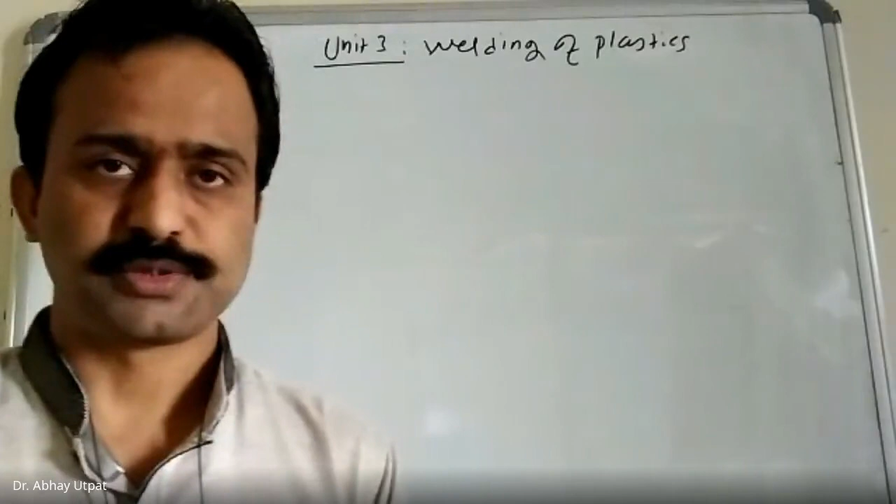In earlier manufacturing or molding processes of plastic, you have seen that a number of unique components are produced by the plastic molding process. There are many big components and big assemblies where you require to join plastic parts. So to join plastic parts, a number of processes are used depending upon thickness, size, material, and complexity of the product. Different welding processes have evolved.

So the word welding is not new to you. This is a very old word. You have already known this word, maybe even before starting your engineering.

In this process of joining metallic components, the base metal temperature was maintained - that was applicable to metallic welding process. Same concept applies to joining plastic components, where instead of base metal, this is base plastic. So I will use the word base material instead of metal - base material temperature, its melting point.

Now, not only melting, but one important thing is degradation temperature. Remember, this is the important difference between welding of metallic parts and welding of plastic. In welding of plastic, you are going to plasticize it, but you have a limitation of heating - don't go to such a high temperature that degradation of the plastic starts, meaning it will start losing its properties.

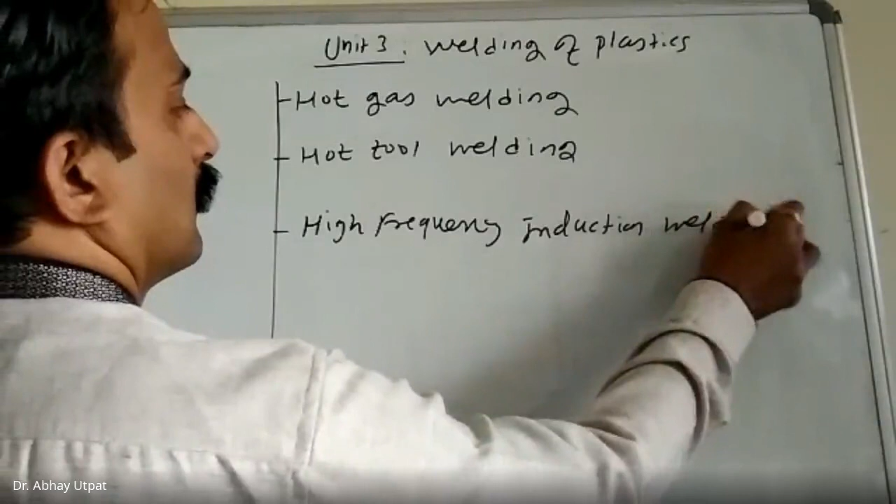Now let us see the classification of these welding processes. We are going to cover 4 to 5 processes: hot gas welding, hot tool welding, high frequency induction welding, infrared welding, and nuclear welding.

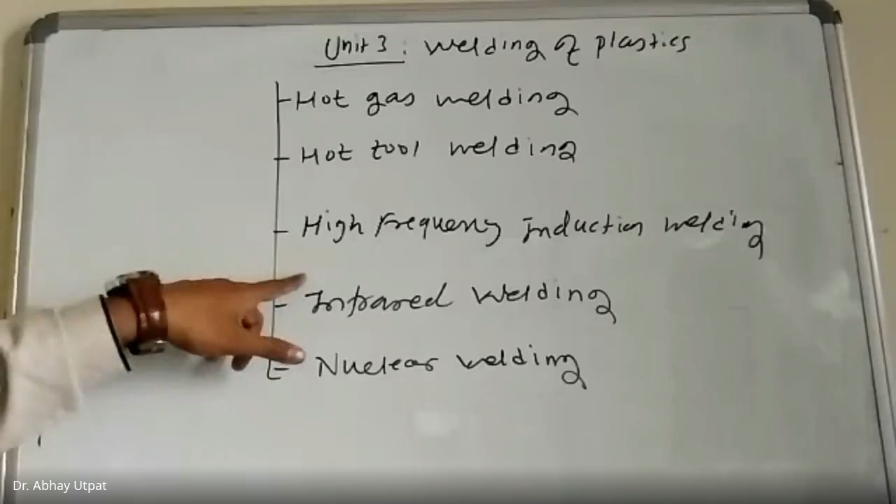So how to join plastic components? Welding means the joining process. The different plastic components are joined by using the following methods: hot gas welding, hot tool welding, high frequency induction welding, infrared welding, and nuclear welding. With the help of these processes, we are going to study the joining of plastic.

And why is joining required? Why is welding required? Because when it is not possible for us to produce such complicated components, and when there is a limitation - for more and more complexity of the component, you are going to have to change the design of the die.

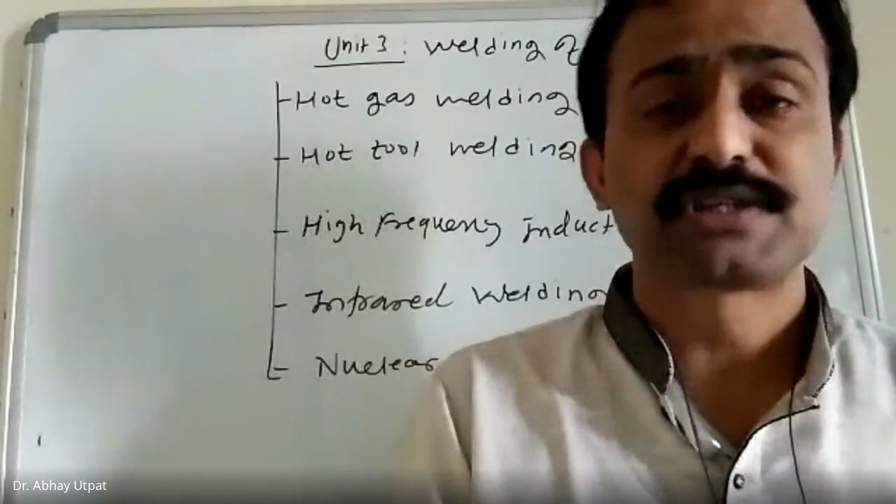And for your kind information, even to manufacture a simple plastic component, you require a metallic die - die steel is used. Don't just count that the weight of the die is 10 kg and calculate steel cost that way. Its design cost, manufacturing cost, and other costs go beyond 2 to 3 lakh rupees for a simple die, and beyond 20 lakh rupees for a complicated die.

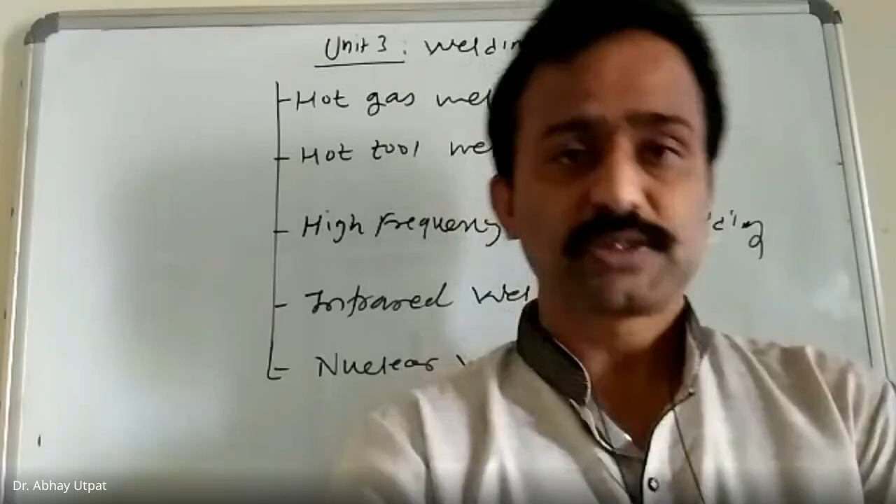That's why little complexity is compromised, and it was made possible by joining the components, so that you'll get the unique component after joining.

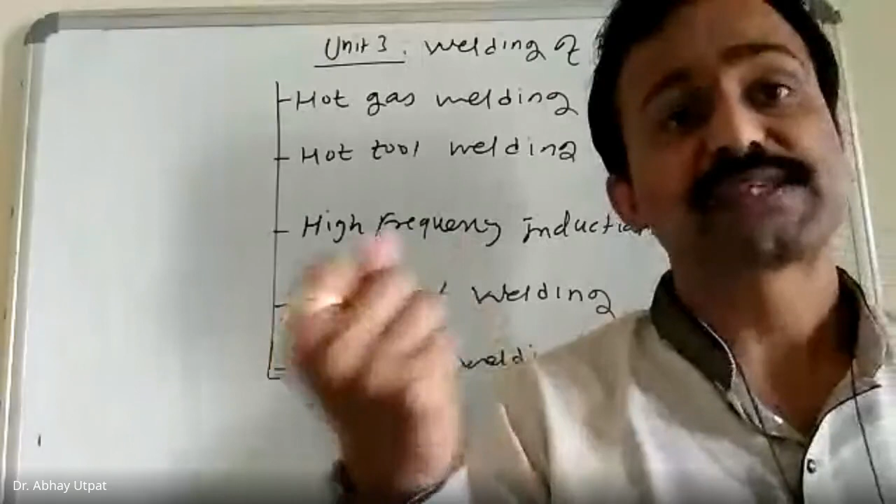Now hot gas welding. Here there is no actual welding of the metallic parts as in gas welding. Gas welding means gas is used for making the flame. Here there is no flame.

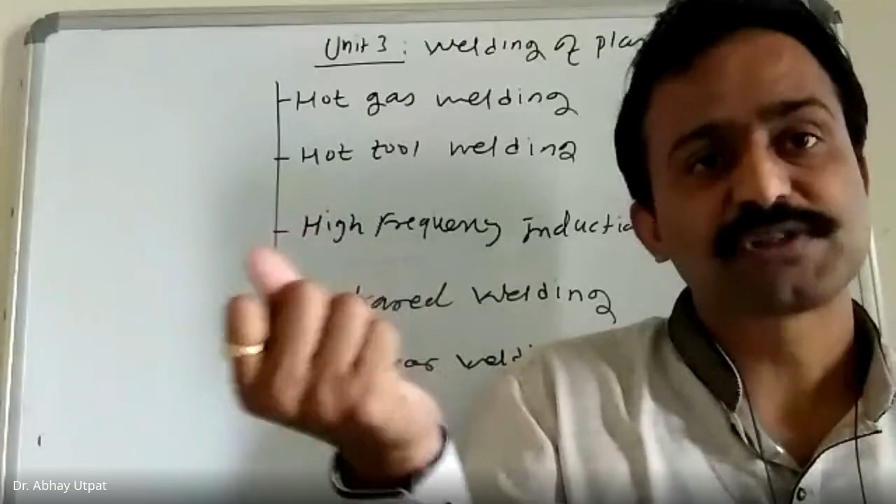Remember, this is one more difference between welding of plastic and welding of metallic parts or alloys. In gas welding, acetylene gas, hydrogen gas, or their combinations are used for producing the flame, and that flame is held against the metallic part to melt it.

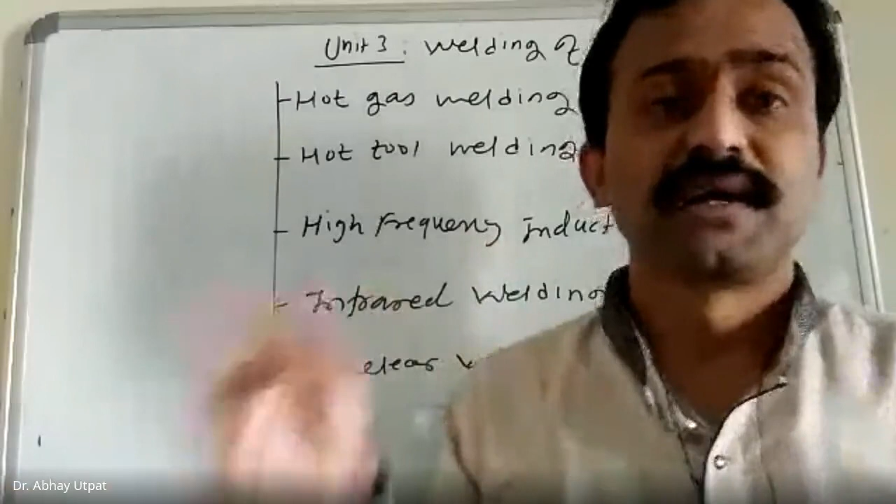Here, this gas is not going to make any flame. The gas itself is hot, and that hotness, that temperature of the gas causes melting and plasticizing of the plastic.

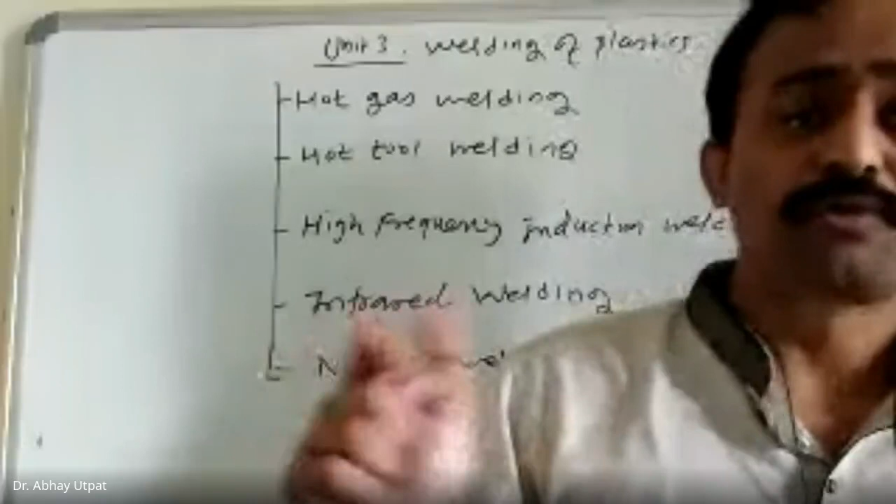Usually air is used. Hot gas means hot air. Otherwise you have to use some gas like argon, which will not make any reaction - neutral gases are supposed to be used.

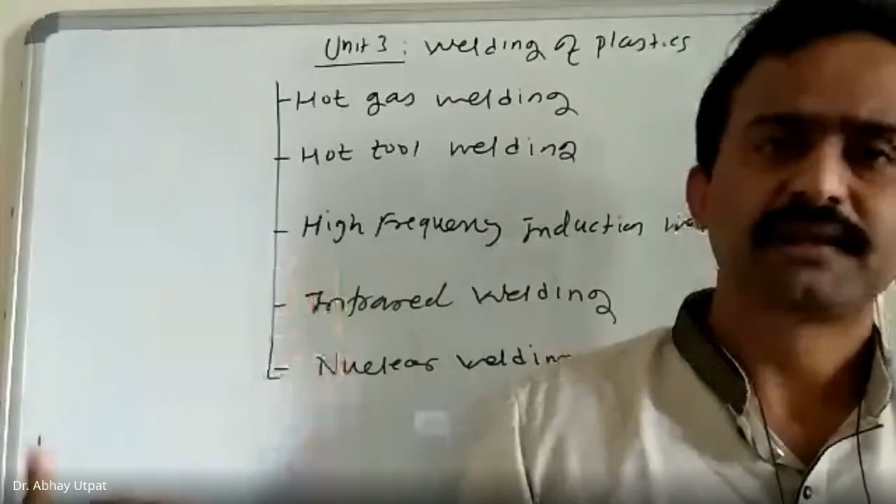So the best way is hot air, hot compressed - hot air is used, and it is forced against the joint through the nozzle. The temperature of air is maintained in a separate chamber, with heaters, and through that heater hot air enters the nozzle, and from the nozzle it enters the joint, and that temperature of air causes melting of the part which is to be joined.

So there is no flame as such. I repeat: in case of gas welding of metals, gas is used for making the flame, and there is combustion. Here there is no combustion. Remember, this is the main difference.

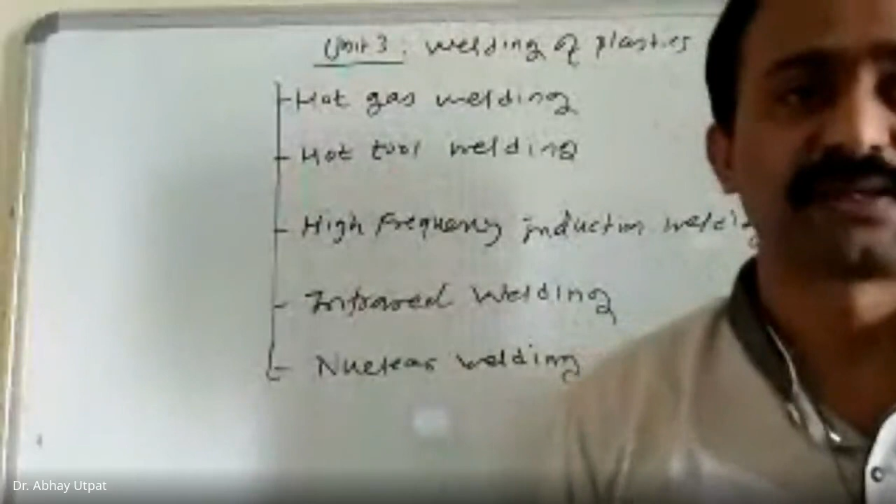Hot tool welding: some metallic tool is made hot, and that is used for plasticizing the plastic. Everywhere, the aim is to plasticize the plastic, to make it semi-solid.

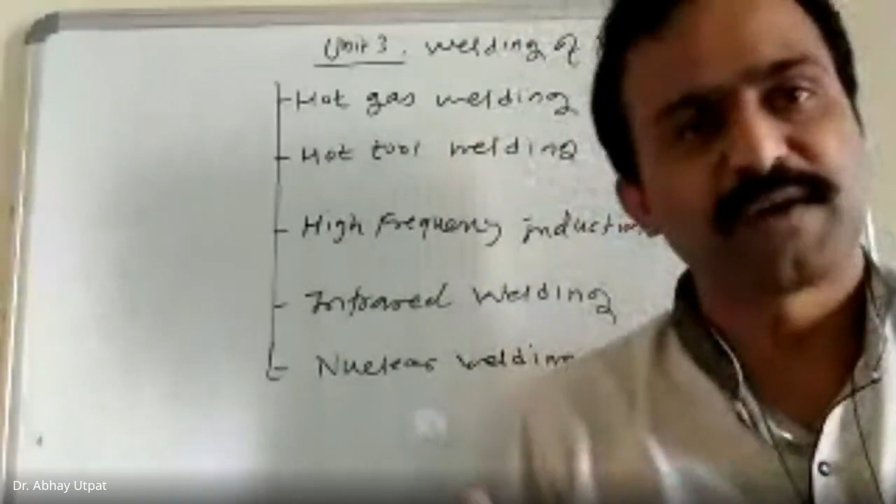Then high frequency induction welding - you know the induction principle, when current is carried through the primary, it generates in the secondary, and the process is carried out. Infrared rays are used for heating the plastic surface, bringing it to the plasticized zone.

And nuclear welding means bombardment of protons etc. is used for providing the heat. The aim of every process is to provide heat for plasticizing the plastic. So let us see one by one.

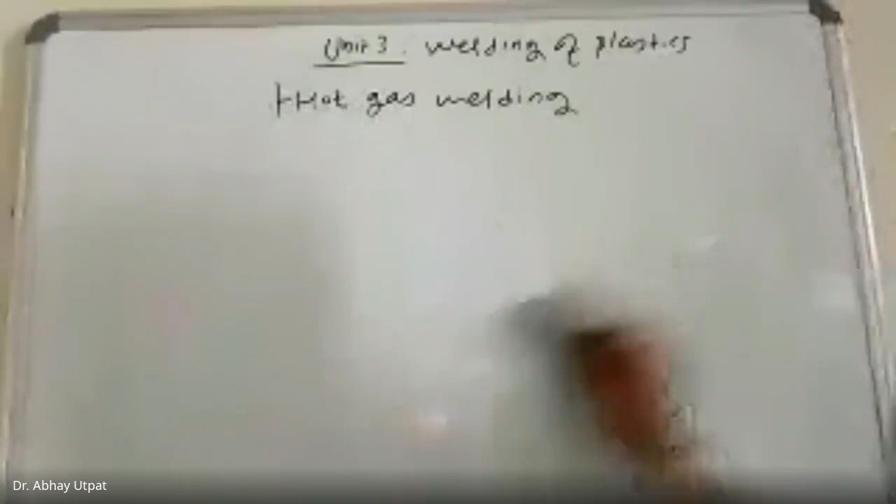First, write down hot gas welding. I'll draw the figure, you can draw along with it. A simple figure.

This is called beveling - making the bevel-like shape notch so that filler material can be filled.

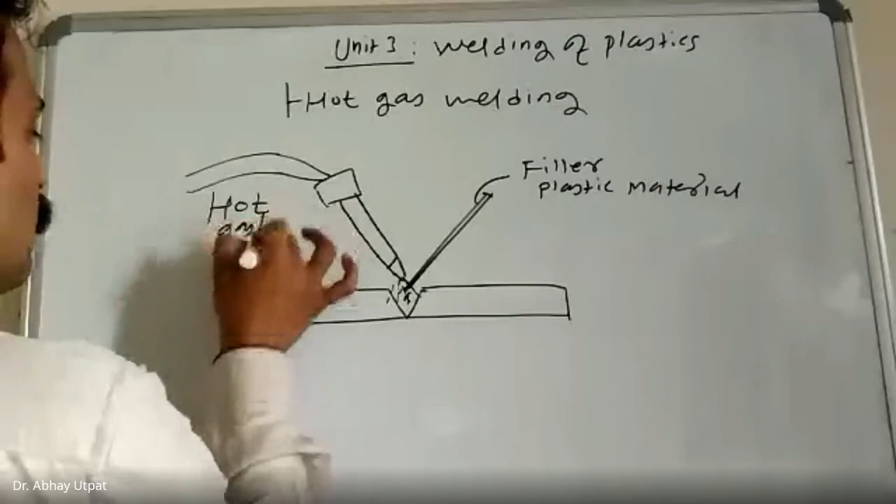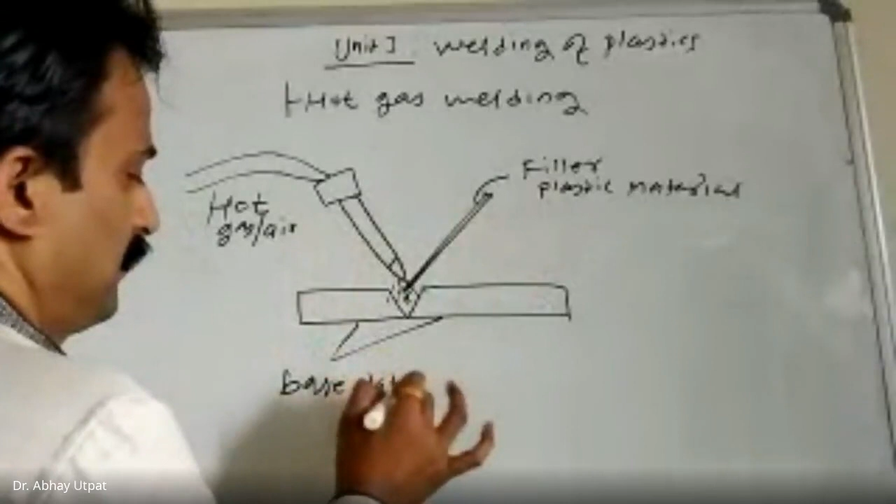So this is the source for hot gas or hot air through which heat is generated, and then it will cause melting of the base plastic as well as the filler plastic. These are the two base plates. Draw this simple figure.

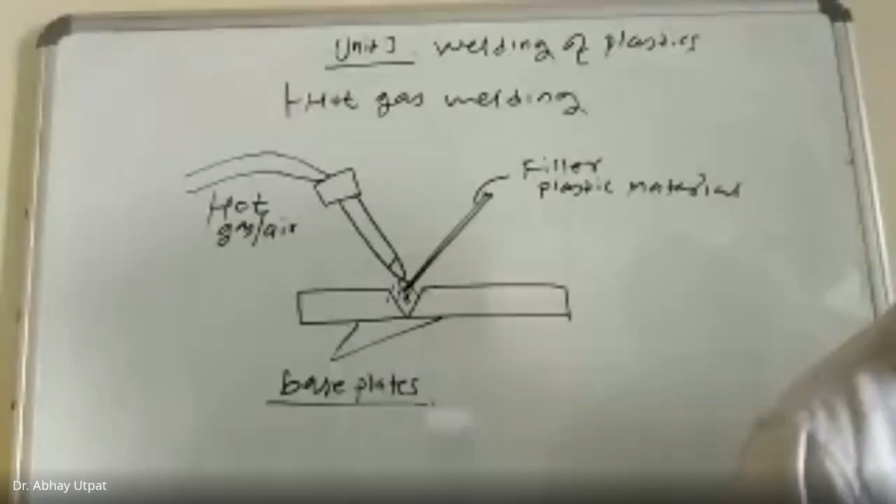This process is used for joining many thermoplastic materials. The temperature of heating varies around 400 to 700 degree Fahrenheit - 400 degree Fahrenheit to 700 degree Fahrenheit.

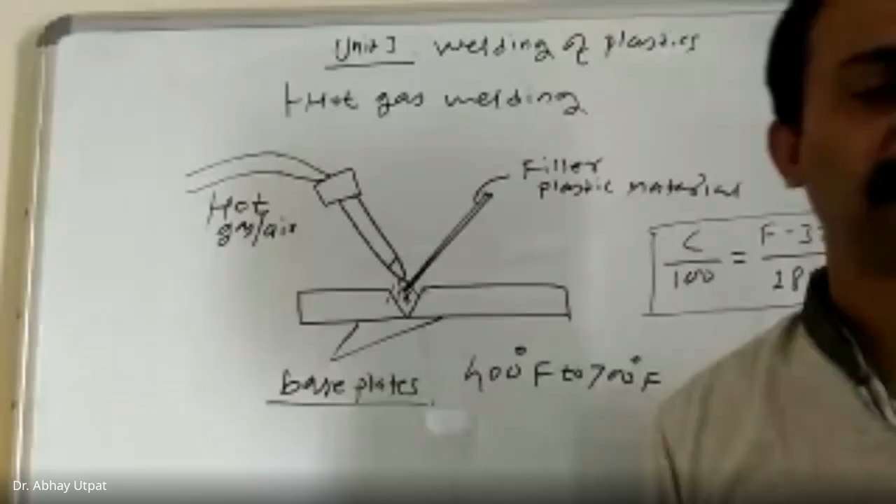So how to convert degree Fahrenheit into degree Celsius? You must know: degree Celsius upon 100 is equal to degree Fahrenheit minus 32 divided by 180. You can write this formula at the upper side. So convert this 400 - if you put the Fahrenheit value here, accordingly you will get degree Celsius. So C upon 100 equals F minus 32 upon 180.

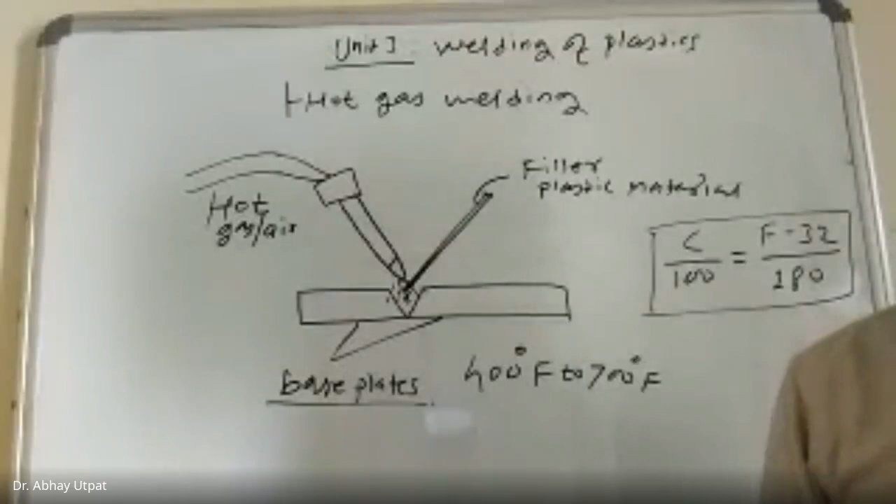Whatever molten plastic is there, it will spread away. This should not happen, so skill is a little required here. And the pieces which you want to bond, I already told, must be produced with a V-shaped joint or it must be beveled.

One important logic, same as metallic welding: this filler material must be of the same material as the base material. Otherwise, there will be a mismatching of the properties.

Whenever the filler rod is used, it is held against the hot air so that it will melt and fall. Material falls into the gap in the form of droplets, so it fuses into the joint, and heat from the gun is directed at the interface.

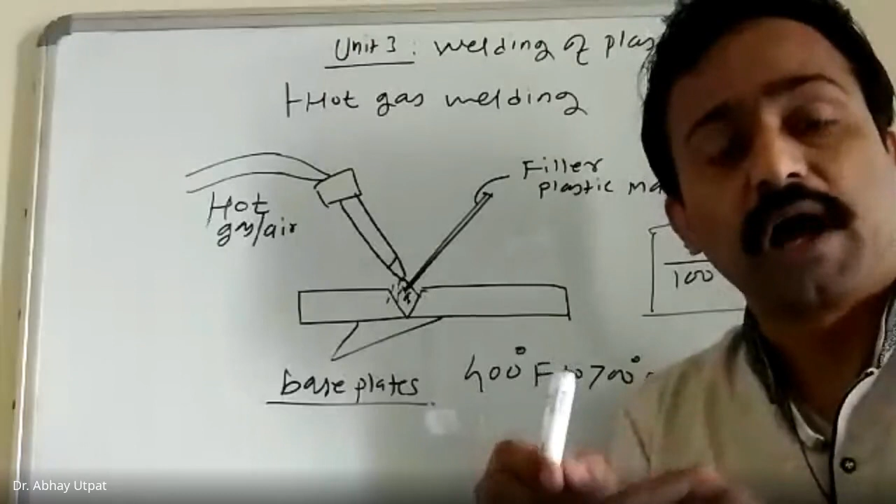From the chapter on welding in manufacturing processes, do you remember the different ways metal deposition takes place? As a curiosity, you can search that book and check the metal deposition processes.

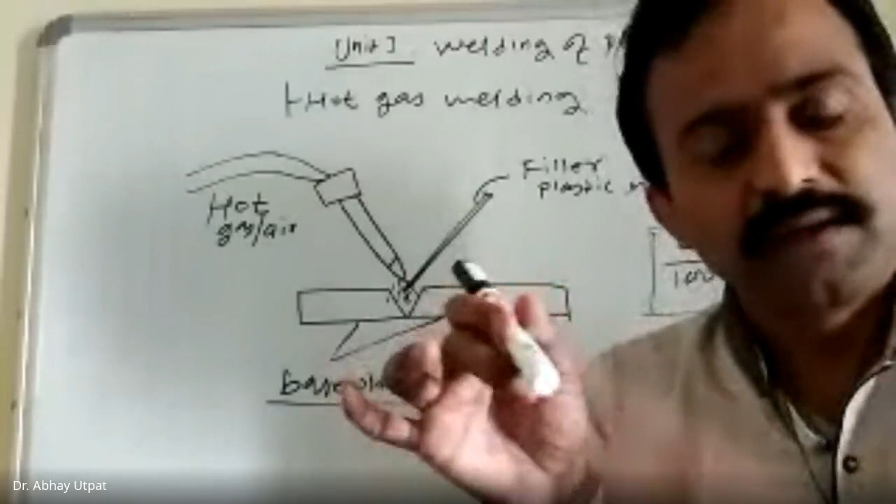Now here there is no metal, here is plastic. But whatever material deposition takes place, it is by a different mean. With the electrode used in metallic welding, the consumable electrode goes into the gap either directly in the form of droplets, or it may go in the form of sprays. So that process is totally different.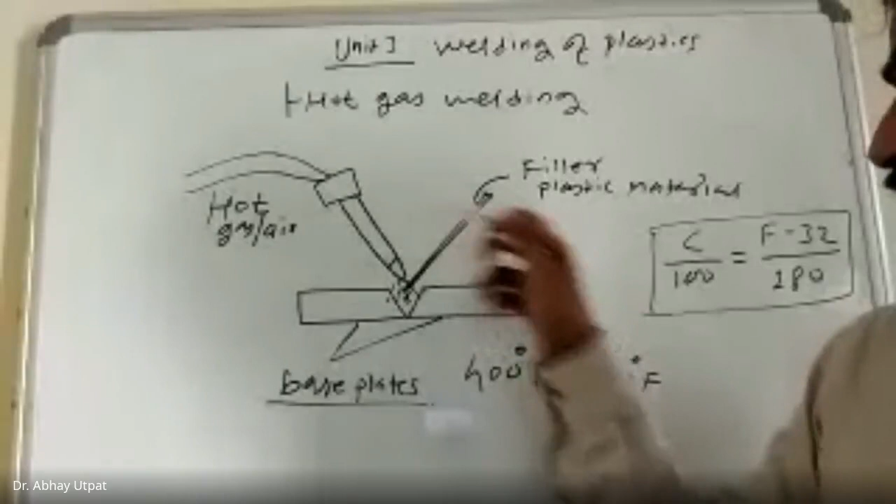Here, the plastic rod is heated by hot air. It will be plasticized. Material falls into the gap, and at the interface again, the gun is held so that a complete joint is produced by mixing the filler at the joint, and after cooling you get a strong joint. This molten product is directly at the interface, and it fills the gap. Whatever gap you have provided, accordingly this gap is filled by the rod.

After the cooling process, your aim is that the joint produced should be very strong, like a unique component. A strong fillet must be formed, which is of considerable importance.

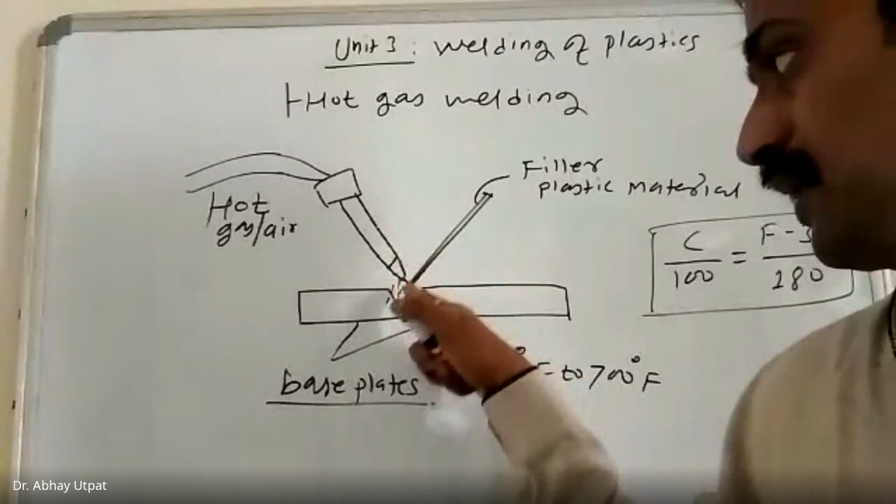Otherwise, if you just join and fill the plastic material at the gap, and there is no combination or complete mixing of the base metal with the filler material, then your joint will not be strong, it will not remain for a long time, and there will be failure of the joint.

One important thing, I am repeating this statement once again: what temperature are you providing here? Its range is given by me, so you have to check this temperature against the melting temperature of this plastic and its degradation temperature.

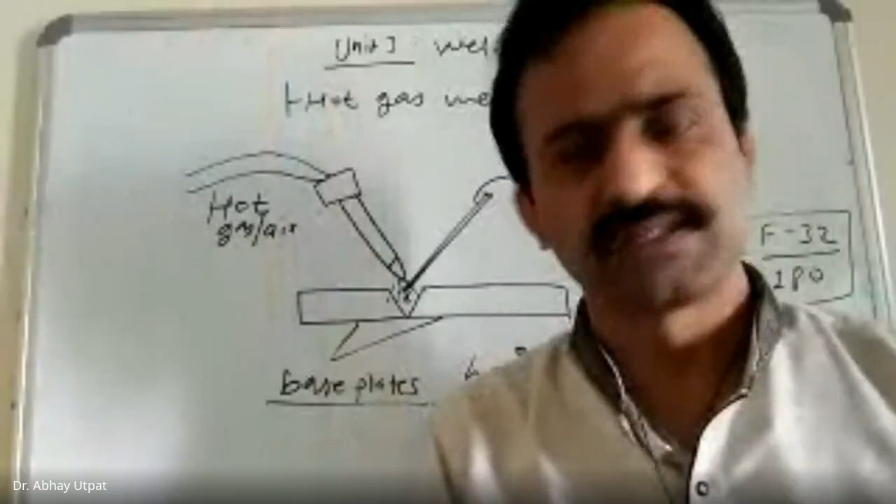There is no question of degradation of metal in metallic welding, because if the melting point is, say, 1000 degrees Celsius, you provide heat and the temperature rises to 1100 something, and there's no problem, the molten metal and filler rod get combined. But here there is a problem, because this plastic is a polymer-based material.

Plastic is a polymer-based organic material, C and H elements are there. If you heat more than the optimum temperature, melting will be fast, and joining and combination of the filler and base metal will all be achieved.

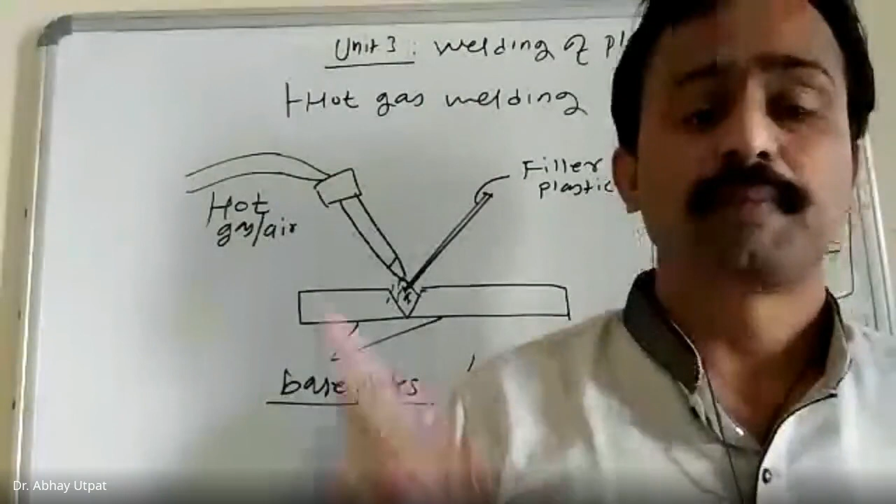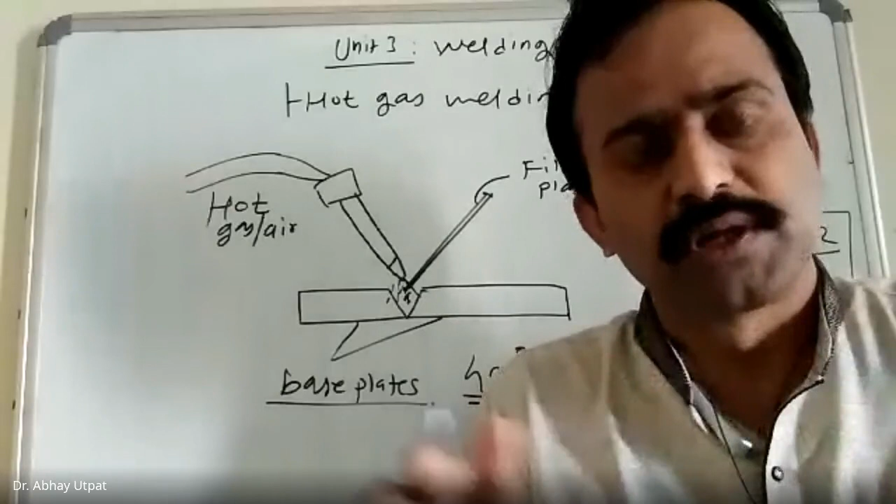But on the other hand, the plastic will start losing its properties because of high temperature of the air or gas, degradation. That's why your heating temperature must be maintained such that it will just melt, just make the plastic semi-solid, just plasticize it, so that there is mixing of filler into the gap of the two base plates.

No other requirement than this. Overheating will cause this degradation. Even in metallic parts, overheating and burning is one of the defects in forming processes. Burning causes it to become blackish and lose its properties.

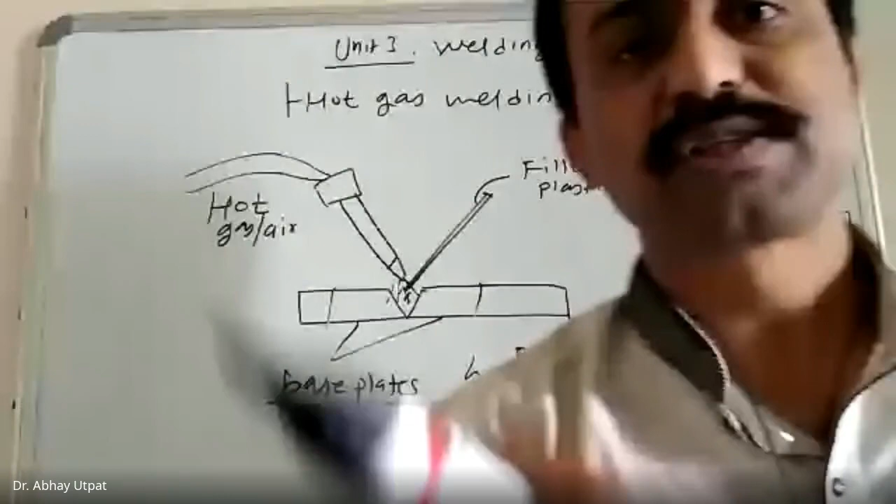That's why in metallic welding there is a very important concept. What is that? Can anybody tell? Now this question goes to you. In metallic welding, the surrounding area is called something. I want the answer from your side. You can do your research work on it, an interesting topic.

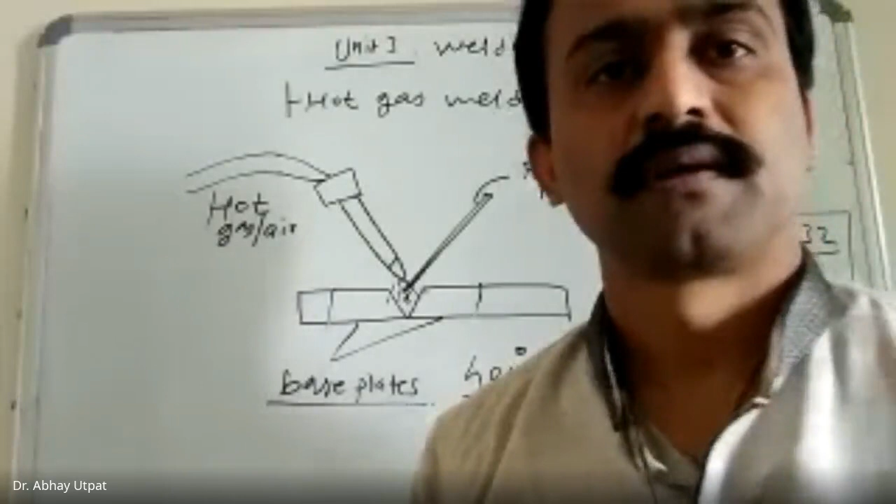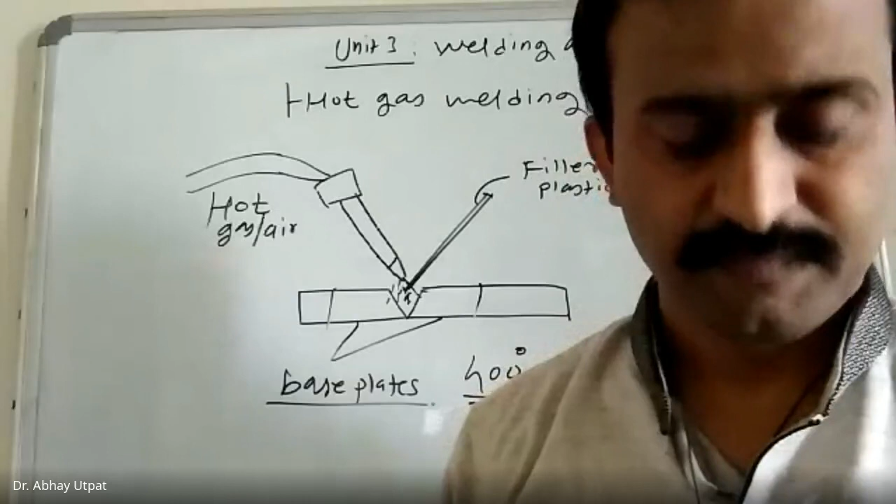Ajinkya Jadhav, roll number 23. Roll number 23. This is the problem of your class, you are not alert, who will tell willingly? I want an answer, what is this area called? Narayan Vyavare, Mr. Narayan Vyavare, are you there? Akash Kendre. Yes sir. Answer my question, Akash. My question is, this is a welding area, what is it called surrounding the welding from both sides? This is one zone, I have given 50% of the answer to you. What is this zone called which is around the welding spot or welding area? Yes?

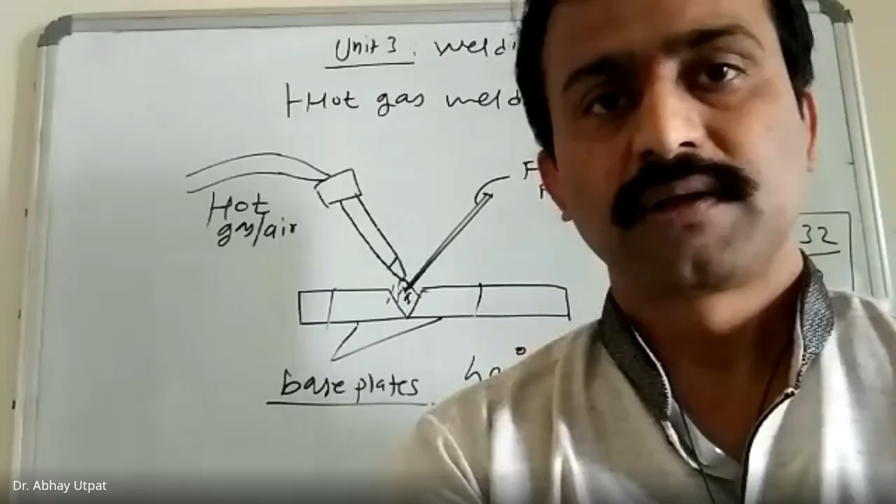You don't know this, Akash? No, sir, I don't. You are in 8th semester, mechanical engineering. Not only you, all people. This is called heat affected zone, HAZ. You have studied this in second year. Are you knowing this? Yes, sir. Have you heard this word? Yes, sir. Okay, now you can unmute.

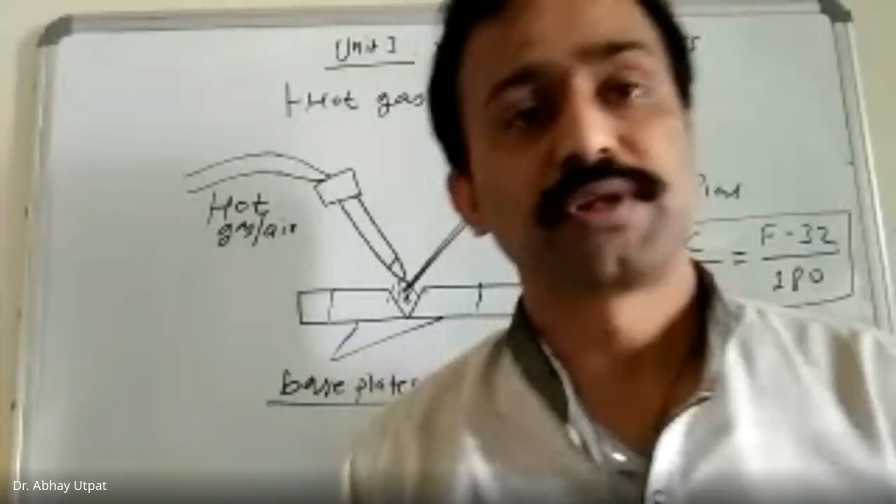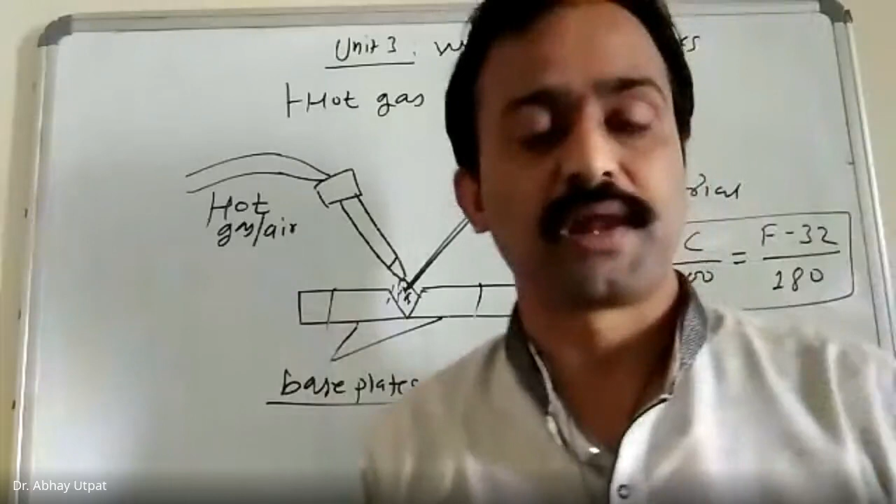So there was a concept of heat affected zone in metallic parts, and we have studied metallurgy too. If you are joining steel, then surrounding it, because of the heating and cooling cycle, there is a phase change. If your base steel is pearlite and you don't want to change it, sometimes the phase near it becomes martensite or bainite, or if it's already martensite and you are joining it, because of air cooling it becomes pearlite once again. That's why that zone is called the heat affected zone.

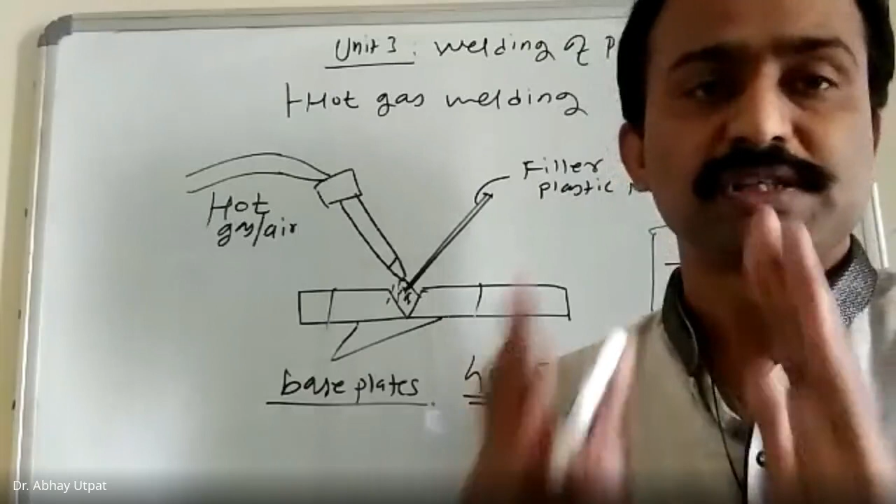So in case of plastics, you can consider this as a heat affected zone too, but to avoid the degradation, you must ensure that the heating temperature of gas or air is optimum, just to fulfill the purpose of melting, not for extra heating, to avoid degradation. Air is used best because it will not affect any other properties.

Plastic materials like polythene and similar types undergo oxidation, and that's why the selection of hot gases and hot air must be proper. Sometimes safety gases or neutral gases may be selected instead of air, because many times air may cause oxidation. To avoid it, neutral gases are also selected. That's why the process is called the hot gas process, with air considered as one of the gases. So to avoid oxidation, hot gases which will not cause any oxidation are also used.

The most commonly used hot gas is nitrogen. Nitrogen gases are used. Once the welding joint is prepared, whatever stresses are generated must be relieved. After the welding joint, it should not be stressed.

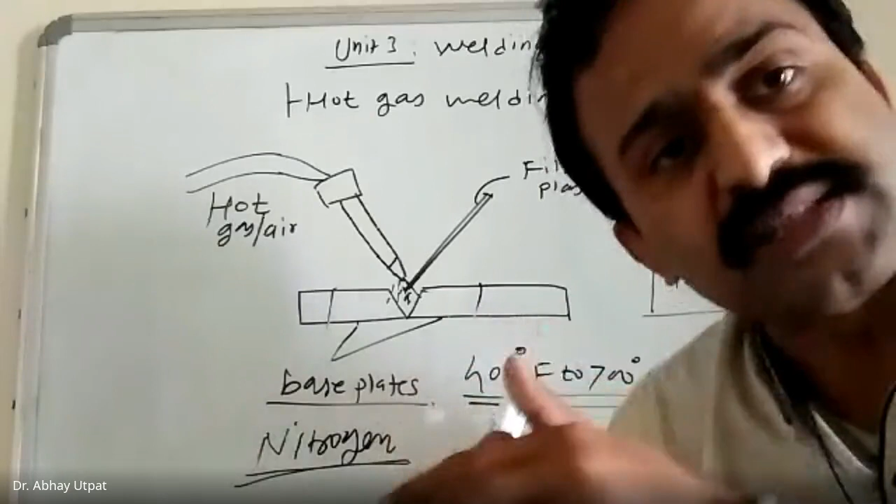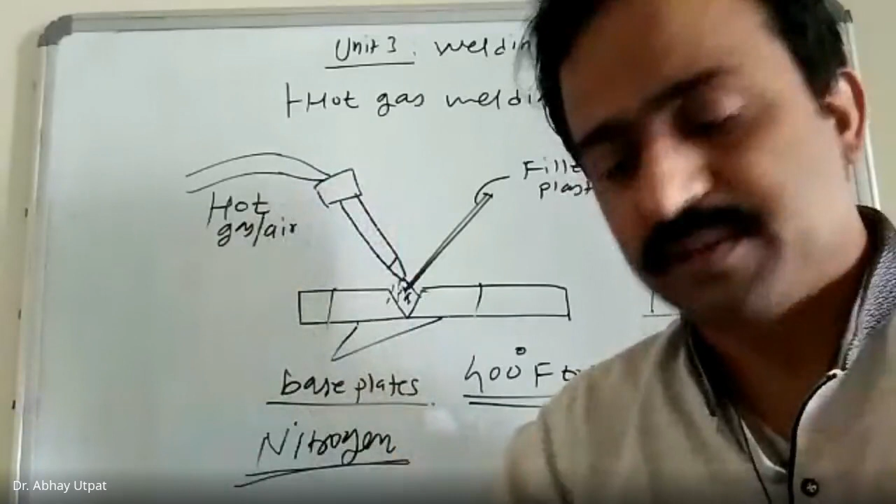Here you produce the joint, and if you try to check it, it will break because you have not yet permitted it to cool. You should not elongate it, put it under compression, or put it under stress, because though the outer side may feel solidified, the inner side is not, as polymers are bad conductors of heat. This is very important: in metal there is a chilling effect, but in polymers, when it comes in contact with atmosphere, the upper area gets solidified, but the inside may still be soft and in a plasticized state.

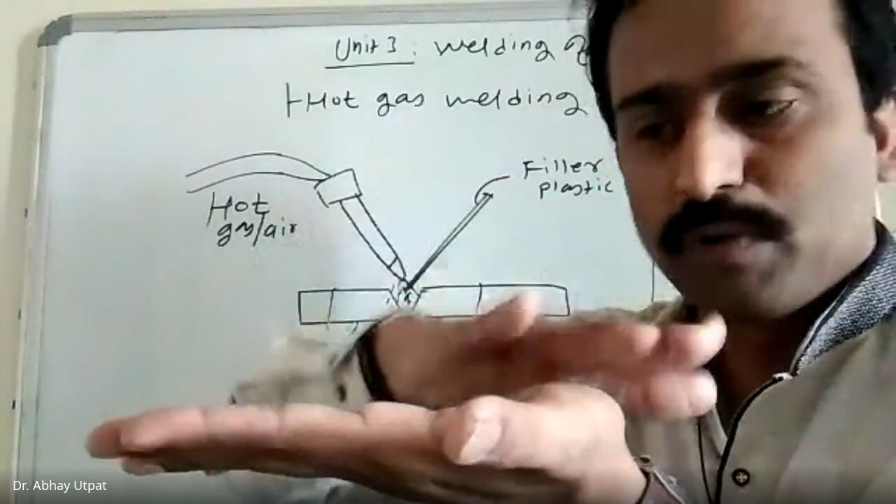What happens is, the upper surface gets solidified, but the inner part, up to the base of the joint, will not solidify easily as these plates are thicker.

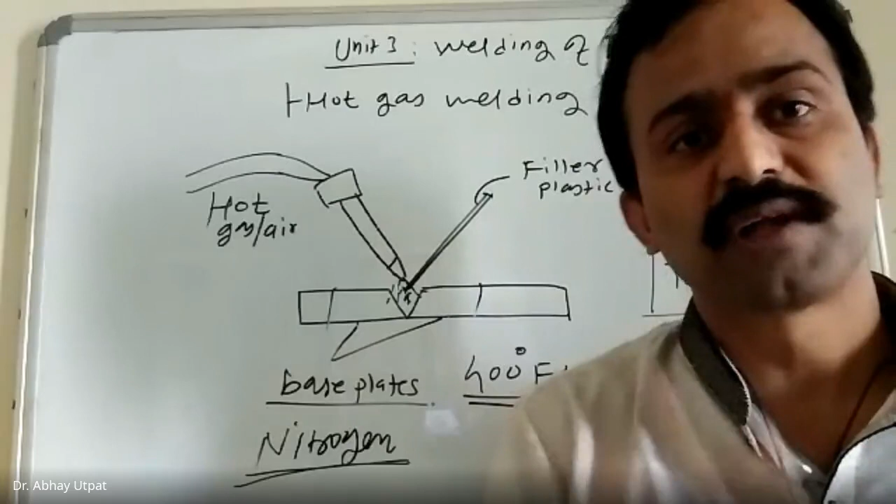That's why, remember, in chapter 4 we are going to talk about minimum wall thickness. So wall thickness is very important. If you select a larger thickness, it takes hours and hours to cool because polymers are bad conductors of heat, unlike metal. Hence these parts should not be disturbed for a particular period, maybe hours, until they completely solidify and come fully out of the plasticized zone.

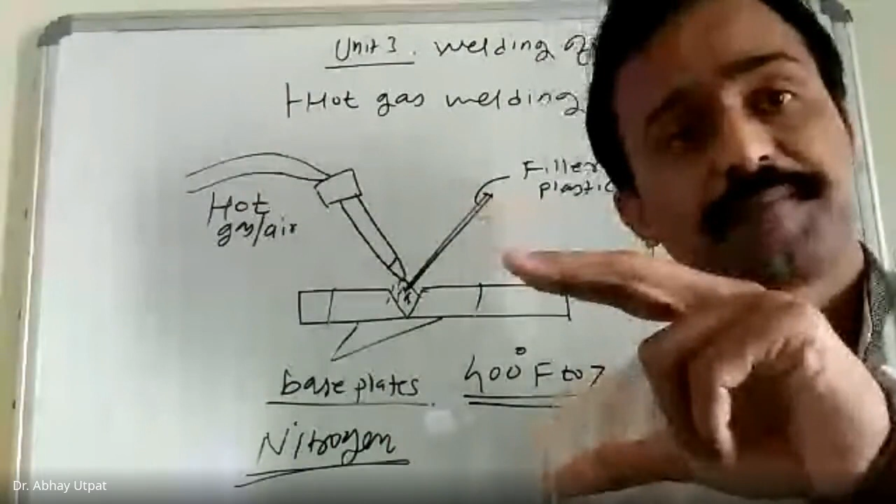4 inch to 6 inch size. And the welded product is not commercially attractive.

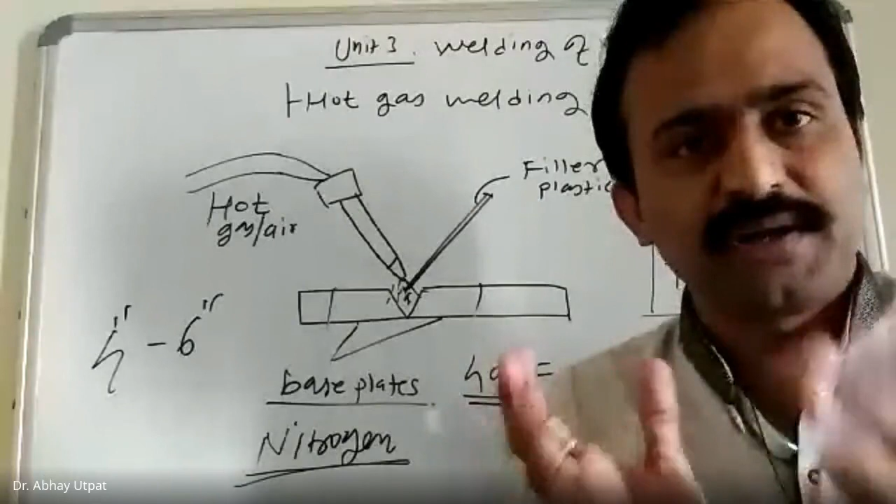Very simple. Joining with the help of hot gas or hot air, and that filler material is going inside, so the attraction or aesthetic look, design you have seen, that commercially attractive product will not be achieved. That's why for some other processes like high frequency induction welding, their products are attractive, because welding is very precise in that case. Here there is no precise welding, that's why product is not attractive, and this may be considered one of the limitations of the process.

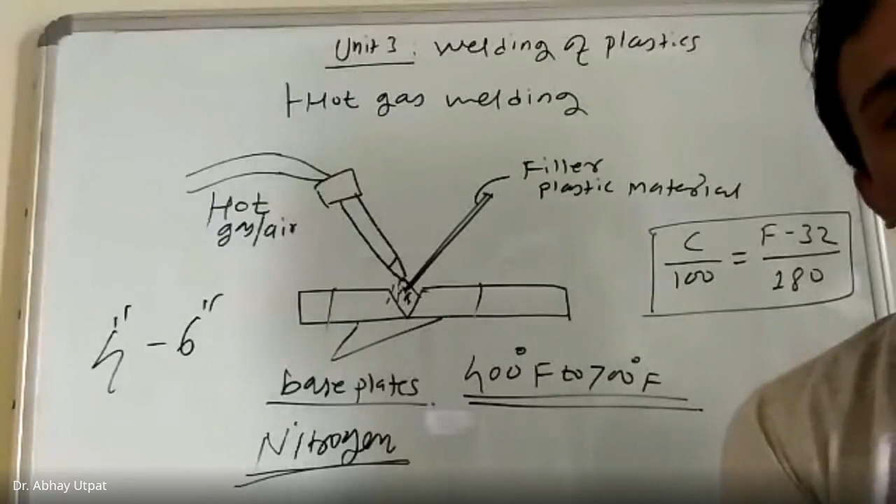We can say one more thing, that tensile strength is near to 80% as that of parent material or base material. If tensile strength is suppose 200 for this base, so the joint's tensile strength may be around 180, 80 to 90%. So that much strength you can achieve with the help of hot gas welding process.

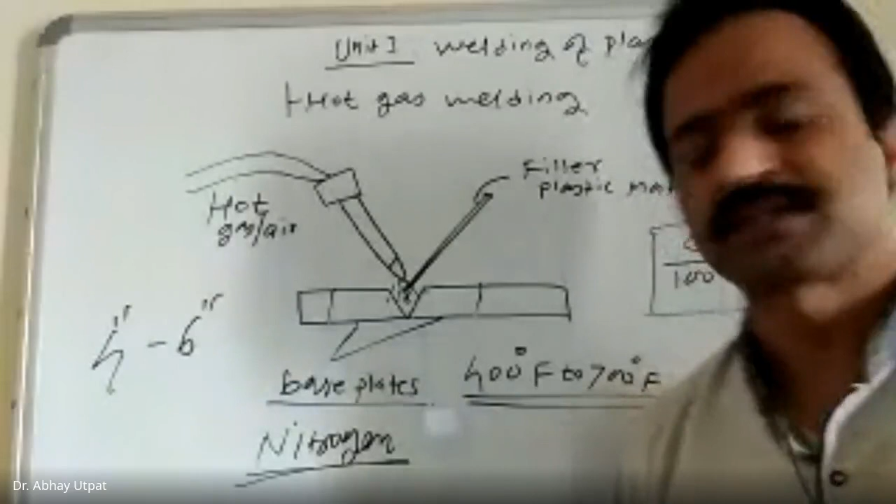And where it is used: large structural assemblies, wherever in industry you have seen there are big structural assemblies made of plastic, this process is employed. So I repeat once again, I will take review in 1 minute.

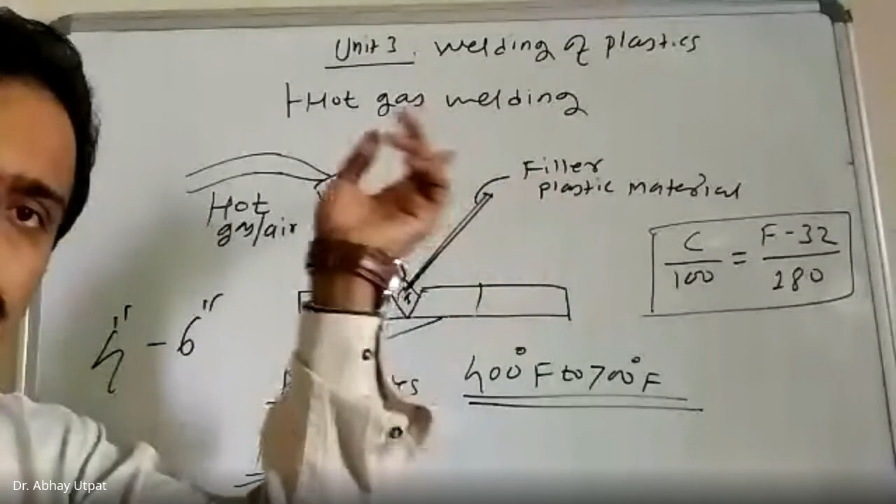Hot gas welding: actually gas or air is used just for providing the heat to the base plate or to plasticize the joint and filler. There is no flame as such like gas welding in metals. I repeat once again, many students get confused. Gas welding in plastic does not produce any flame. Gas itself is hot, air itself is hot, and the heat from that gas or air is taken for plasticizing the plastic. Range is 400 to 700 degree Fahrenheit, and accordingly the minimum temperature for plasticizing is achieved.

Extra temperature, extra heat will cause degradation of the base plate. These polythenes and other material, there may be chances of oxidation. Hence preferably gas is preferred, maybe nitrogen gas. The thickness is more, thickness may be 4 inch to 6 inch, and it is used for large structural joints.

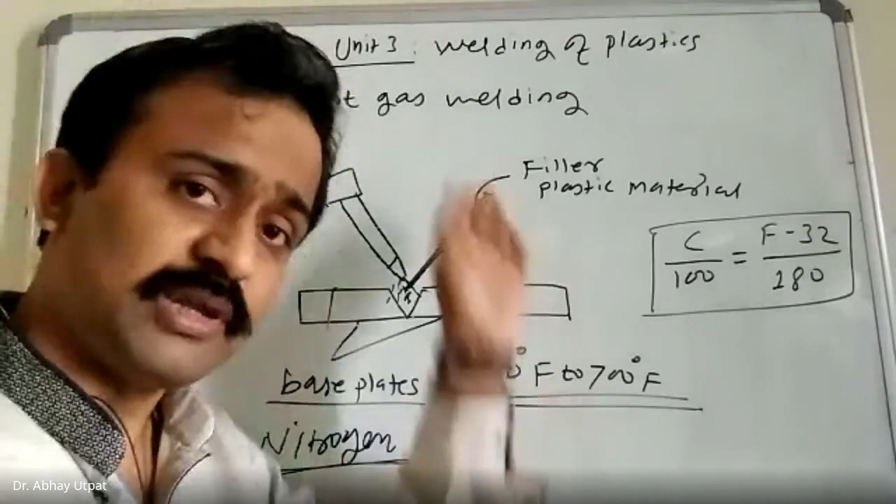Okay, this is all about hot gas welding process. Subjective question may be asked for 3 or 4 marks. We have covered many MCQs here, more than 4 to 5 MCQs are covered in my explanation. They are provided in the booklet, no problem, but whenever I am telling some important things, you must immediately note it down.

This temperature of heating, thickness of the plate, which gas is used, what is the filler material requirement, and how hot gas or hot air is performed for heating purpose, and the part which is joined should be kept for sufficient long time because thickness is more.

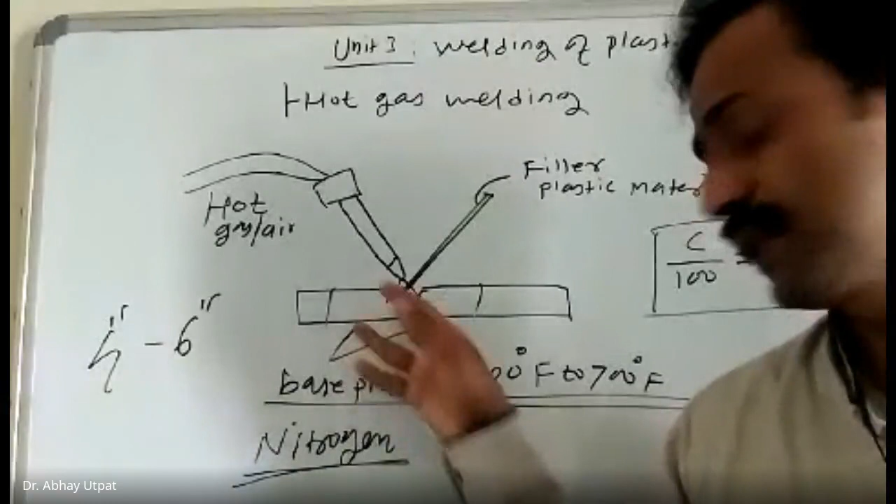I repeat once again, the part which is welded should be kept for sufficient long time till complete solidification at the joint. It may take hours, and that is considered as process time being more, which is a disadvantage. Otherwise, if you try to stretch it or pull it or hold it, the inside part, as I have given example, the outer surface may feel strong, but the inner part may still be in solidifying range, and you may cause breaking of the component in between.

This is all about hot gas welding. So I hope you have drawn the figure. Next, let me explain hot tool welding. Please draw this figure. I hope you have drawn it, and I have not dictated as such. Whatever I have explained to you, I hope you have noted down the points. Notes will be provided to you, don't worry.

Joining of plastic with the help of some hot tool. This is a very general question, even I will ask this to other branch students, they can answer this. So please reply to my question, little participation is required. Shubham Bansode, roll number 8: in drainage pipe joints, okay, drainage pipe joints we have seen.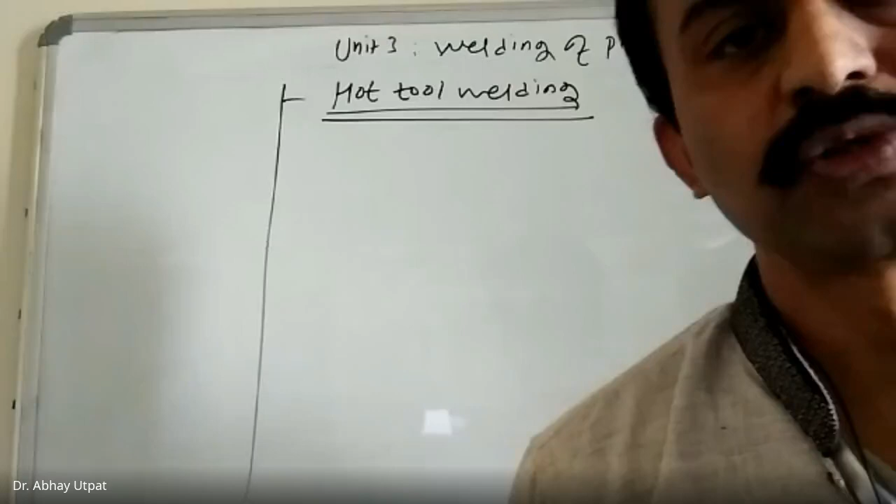How was it, how was any hot tool used there? Tool, drainage pipe joints, the people may be just heating and putting one pipe in other. Abhishek says circular plate, correct. So one thing Mr. Shirsagar has answered correctly. Any other process where the plastic is joined by using some metallic tool which is hot? Any other student? Asture Chandraprabha, roll number 1.

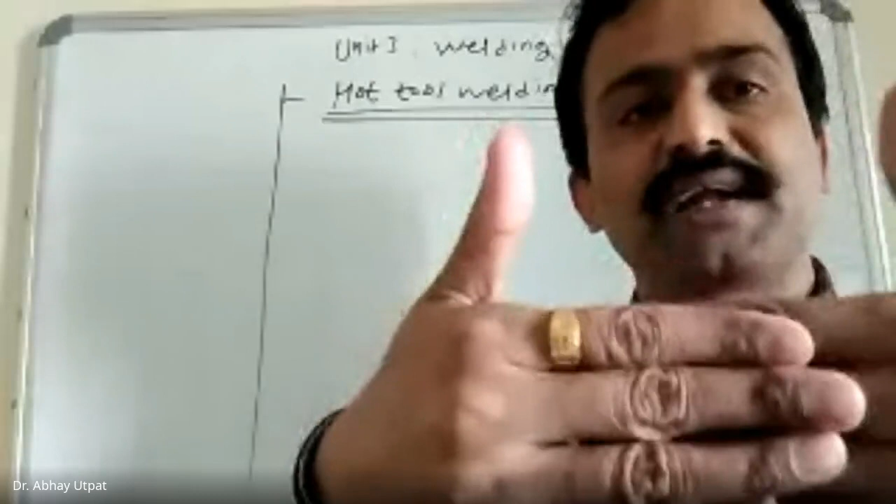There was joining. You have seen in different grocery shops or malls, the polythene bags packed with the grocery material using a press heated tool. Or you might have seen a heated tool or plate kept somewhere. If you go near a Mandir, you will find prasad material being packed by holding it against a hot plate, so your polythene bag gets sealed. Packing of your polythene bag is the best application or example of heated tool welding.

If you have not seen this, go to any grocery shop or mall where packing is going on - material they are putting inside. I will show you: assume this is a plastic bag. Material is put inside, then held in this way, forced against a metallic plate, or kept horizontally with a handle where the metallic plate is at the back, and they press it down. Electric current heats that metallic plate, and when you press it down, these two plastic films get joined to each other.

So joining of a polythene bag is the best example of hot tool or heated tool welding. If you have not seen it, you can go and see whenever you go.

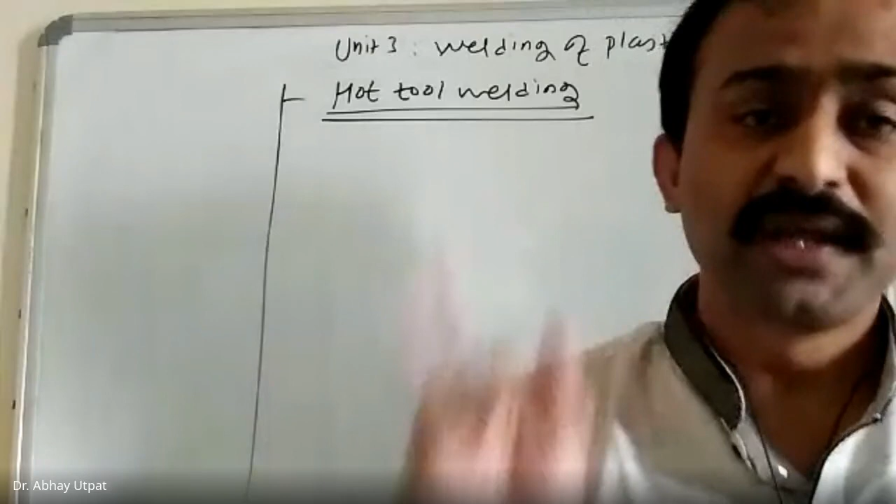Many times in our surroundings, in day-to-day life, we observe many engineering principles, but we don't look at them from an engineering principle point of view - we just see it as a regular or routine process. There are many things we come across, and if your vision is there from an engineering point of view, you can understand these things. So hot tool welding or heated tool welding - the best application is joining of polythene.

This is not only limited to joining polythene bags, but there are many thin plastic sheets joined with the help of this process. Don't look at it as a single product or batch process - batch process means 100 bags, 20 bags. But in industry, there is a mass process - thousands of plastic sheets are to be joined at a time.

There are other arrangements too - let me show you the example. This plate I want to join with this plate, and it has more width, maybe 1 meter or 2 meters, almost 6-7 feet width. And I want to join it here. How can I make this possible? There are roller type arrangements - putting a large 10 feet plate would not be economical, so a roller type arrangement is made.

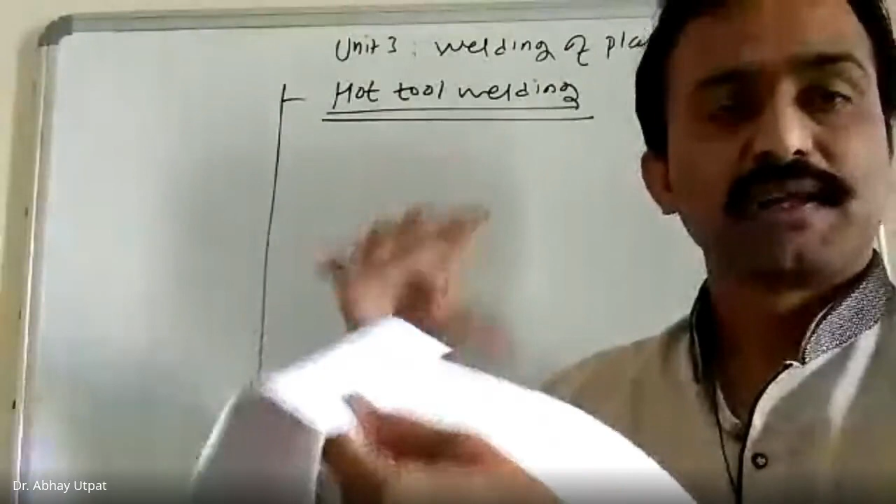The rollers will roll over the superimposed or joint area, the matching area, and the roller itself is hot - upper roll hot, bottom roll hot - and when it moves over it, you will find it gets joined. In this way, one sheet to another, continuously joining will be possible. So these details about hot tool welding or heated tool welding we will see in the next class.

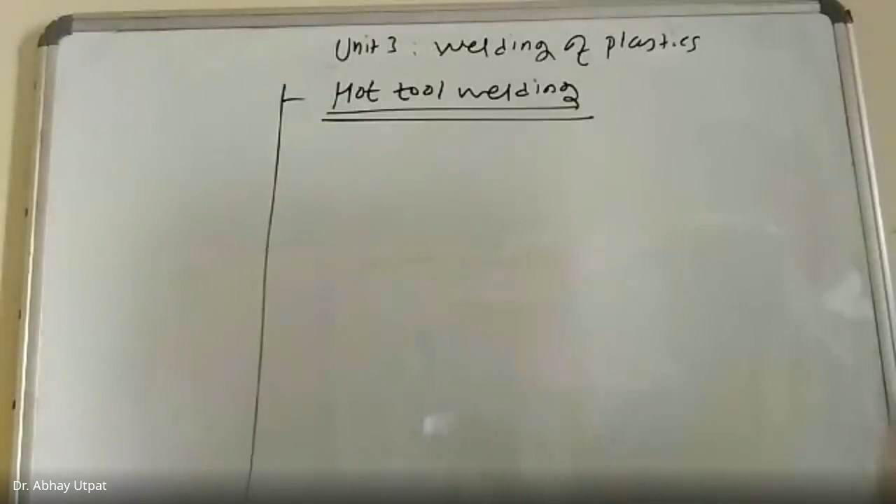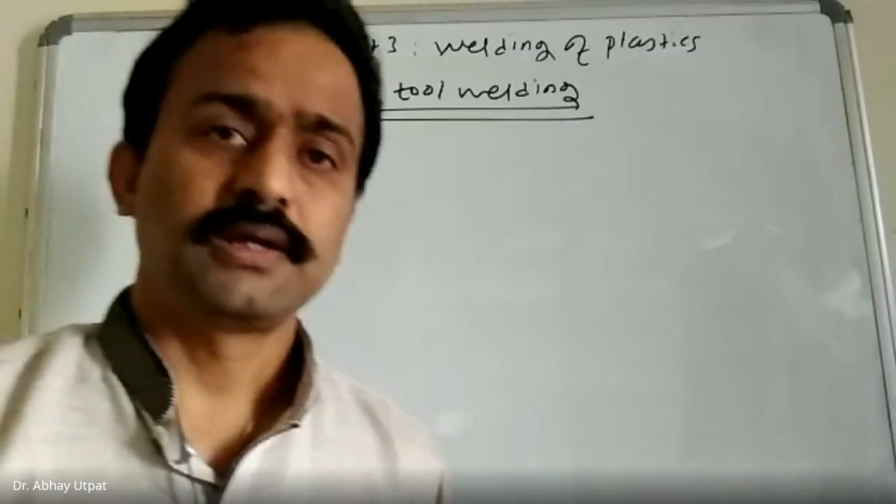Just wait. Okay, one minute.

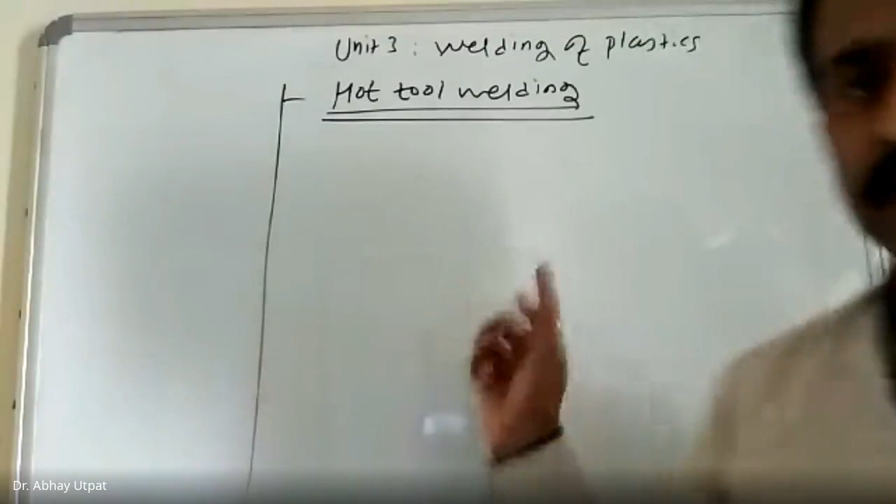Today we have started with the welding process, and we have studied the classification of welding process, out of which one process was finished, and this second process will be completed in the next class.